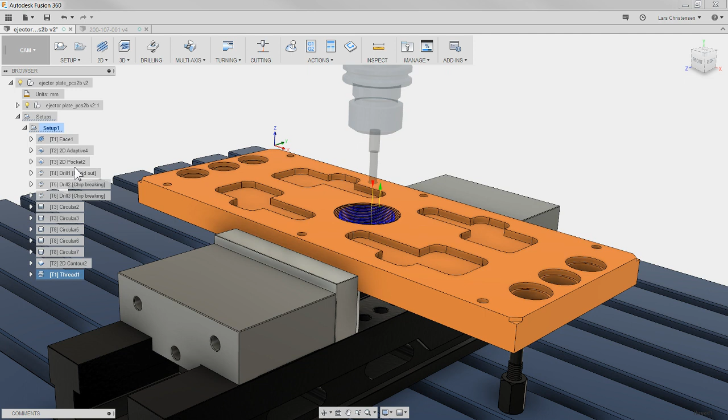So let me switch over here to Fusion 360. This is where we want to be anyways, right? So don't worry too much about what you see on the screen here - you've probably seen me use this one in other kind of environments. But if you look over the feature tree over here, you'll see when I program this part, you apply all these kind of different tool paths to your model. And this is just a fairly simple 2.5 axis, but still, you end up with all different kinds of tool paths in here.

My biggest fear when I was programming CNC machines a few years ago was that you'd forget one of these checkboxes, because a lot of what you're doing is fairly repetitive when setting different things. Like right now I'm in a finishing pocketing operation that by default has stock to leave on, but in this case the adaptive actually did all that work, so this is meant as a finishing operation, so you have to remember to turn that off.

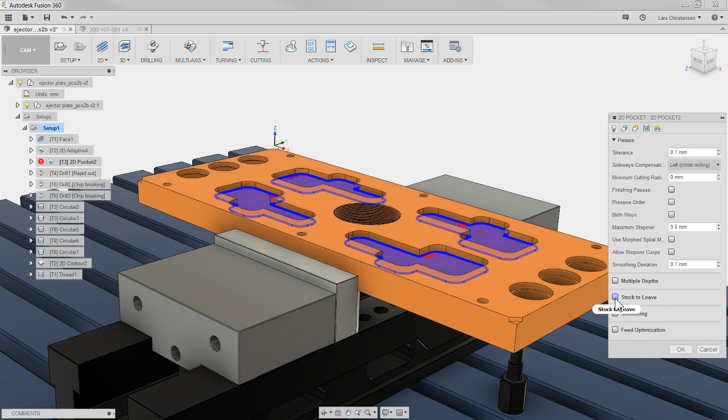You maybe play around with your lead in, lead out. By default it was a helix, but now you want it to be plunge. You're kind of tweaking all these things.

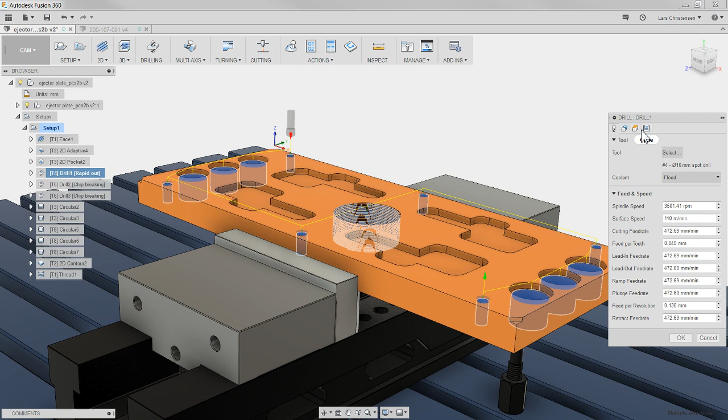This is a spot drilling operation, and normally when I do a spot drilling operation, I always do my bottom height at 1 millimeter from the top. So you're going in and tweaking all these different settings inside your CAM toolpath, and if you're programming on a regular basis, you're doing it over and over again.

My biggest fear when I programmed was always when you make mistakes, it's always like where afterwards you're like, ugh, I knew that.

So what templates will do is let you take something that you programmed where you tweaked everything - feeds and speeds, lead in, lead out, and all these things - and you can save them as a template, and then reuse them again so you don't have to start from scratch all the time.

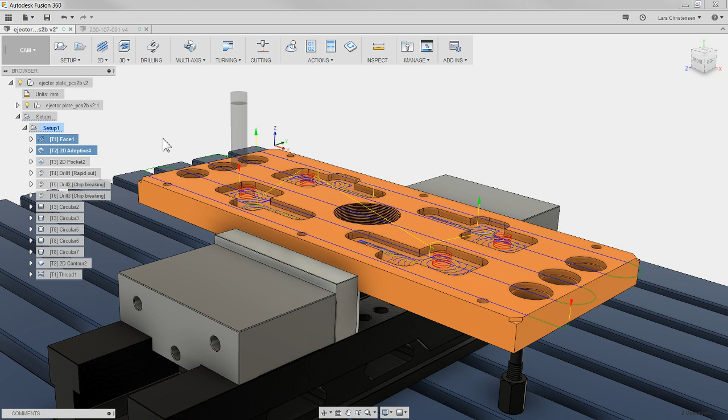So if I go in here, the way you do it is I have this whole setup, and you can either go in and select a few operations, holding down Control or Command if you're on a Mac. You can select a few operations, or what I normally like to do is select all of them - I hold down Shift and select the bottom one. I've selected all these operations that I ran out on the shop floor.

I know that all my feeds and speeds are good for my setup. I know I had the right leads in, leads out, stock to leave, all this stuff. I highlight them all, right click, and go down here and say Store to Templates. When I click on that, it will open up in the location where this is stored.

Now, I'm going to show you in a second - you can actually also do this on the cloud, so I'll come to that in a second. But by default, this is where it will store your templates.

You will see right now I have one called 3 Axis Rough and Finish, and one called Standard Turning. You can name these whatever you want, maybe after a customer. I used to do a lot of hydraulic manifolds, so maybe you program one of those and create a library for that specific customer with those different parts. You can really do whatever fits your situation.

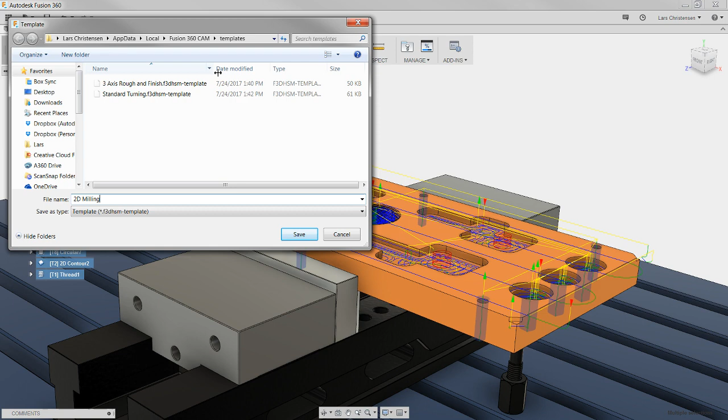So I might just call this 2D milling, and again you'll see where it's saved - by default in your user, your name, app data, local, Fusion 360 CAM, in the template folder. Like I said, I'm going to show you in a second how you can also use the cloud, but I'm going to save this as 2D milling because that's pretty much what it is.

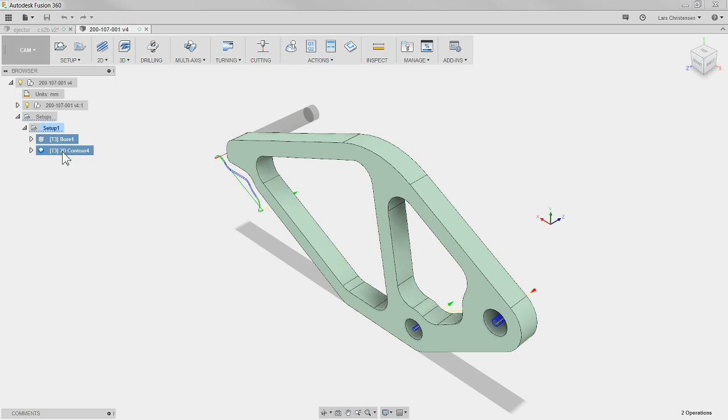So what I've just done is save all these operations in this template with all its feeds and speeds, step overs, and all that stuff. Now tomorrow comes and we've got to go in and program this part. I can see I already have some stuff in here - let's just delete that. Okay, so now you have to program this part, whatever this is.

Maybe not the best examples, but let me take you through this process. So I go into CAM, and you always have to do a setup. I'm going to create a setup, make sure your origin is set correctly, all that stuff you normally do. Nothing new there. When it comes to programming, instead of going up and doing a facing operation, adaptive, finishing and all that stuff...

All I'm going to do is right click on the setup, and right here there's 'create from templates,' and you'll see the different ones I have saved. This is one we just saved, and if you click select template, it takes you back out to where you were. You could actually be clever and create some kind of folder structure out here if you wanted to, maybe specific customers, materials, whatever fits what you think.

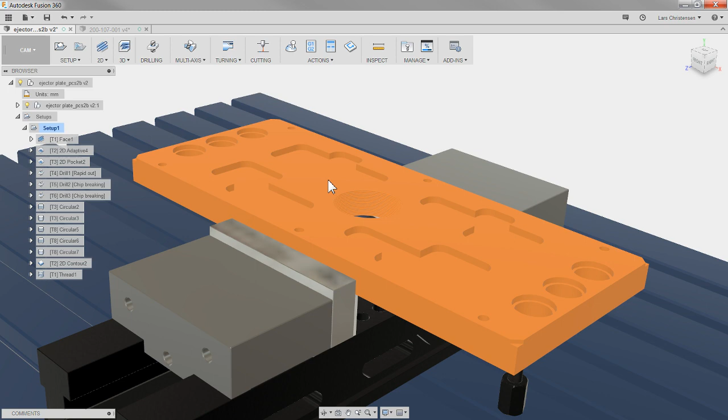But if I select that milling template and hit open, at first you think nothing happened, but you actually get a little arrow here, and here are all those operations from our part over here. Now you say to yourself, well, that's a completely different part from the other one. Well, it is, but a lot of the operations are the same, right?

So what I can do now, you'll see they all have red marks - that's because they need to be generated, just like if you made a design change. The facing operation is pretty simple, so I'm just going to right click and say generate toolpath. That one's obvious because it just finds the outside here. And bam, there's my facing operation with the tool I used in the other one, and I know the step overs, feeds and speeds, everything is okay.

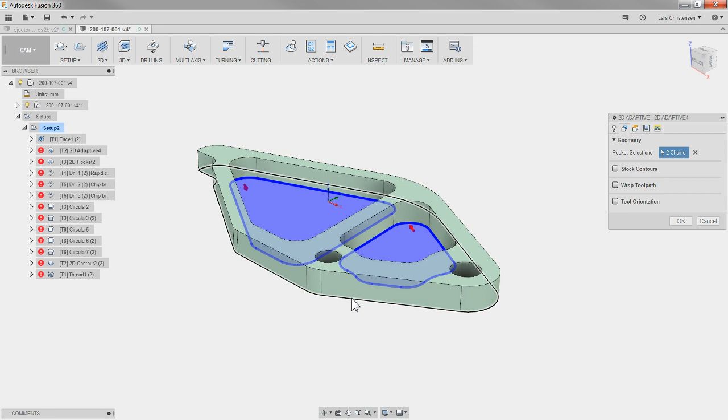When we go down and look at the adaptive, I will have to go in and edit the selection of geometry. So I'm going to right click and hit edit, but I don't have to worry about the tool - that's the same tool with the same feeds and speeds. If I go over to the geometry tab, I'm going to select my geometry. In this case, I might just select the two inner pockets - I want to rough those out - and I'm going to select the outer contour here.

But again, when I go to the heights tab, that's going to be the same as whatever was in the previous operation. My load conditions, my stock to leave, and even my lead ins and lead outs are all going to be from what we had on this file. If we had confirmed that everything worked - oops, I just exited out of it - then you can trust that, A, you're not going to forget anything, and B, that this is already verified.

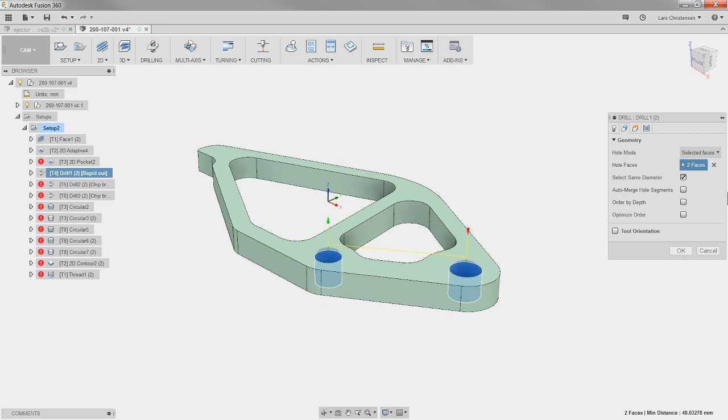Same thing, like I said, I pulled out my spot drill. If I go in here and edit the holes, again my spot drill is selected from that library. I can go in and select the holes here, the two holes, and I now know that my depth is again from whatever I set in that template.

So creating these templates can save you a bunch. Now there's certain things in here that I know I don't need - there was a threading operation on this one over here, but this one doesn't have it. Well, all I have to do is click on it and hit delete on my keyboard, and it's gone. I can delete the operation, right click and hit delete, whatever you want. I can delete the operations out of here that I know I don't need. This is definitely a lot faster than creating all the ones every single time.

Now, one of the questions I got from one of you guys was, how do you delete templates after you have created them?

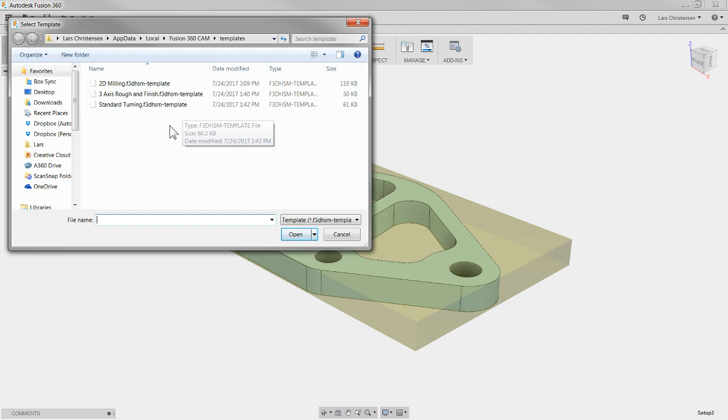Well, all you really have to do is go into one part, right click, and you can go into create template in here. And if I go and hit select templates, I'm brought right back into where they all are. And this is Windows, right? So I can just literally right click here and hit delete, and I can delete that template out of there again. So if you ever got to clean it up or something like that, or you can also just, of course, navigate right to this area.

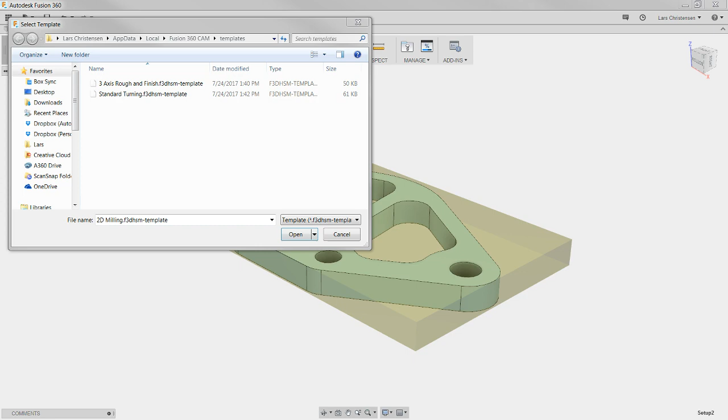If I go in here, if you select up here, you can do a Control C, and then you can just open up your standard Windows browser and paste that selection in, and you're back inside of that area. And you can completely reorganize this in here. If I go in here, maybe I create a folder in here, you can see that it becomes created right in here, and I can now rename this one whatever I want. Materials maybe, customers maybe, really what you find helpful.

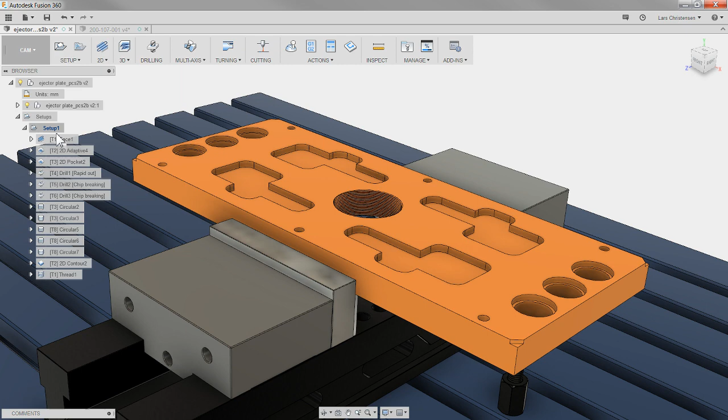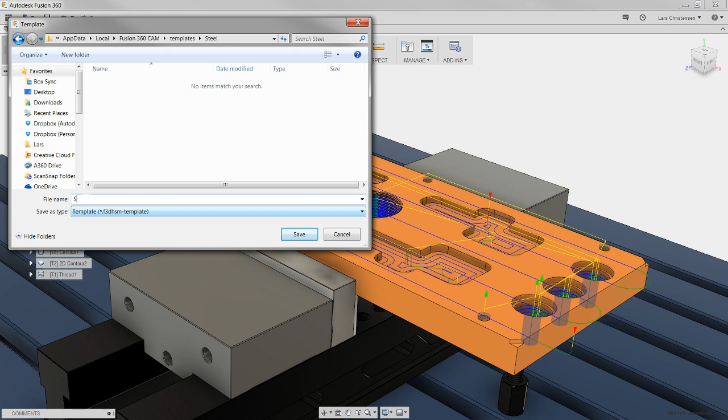So how did I do that again? Let's go back into the first one. I selected the operations, not the setup. I selected the operations, and you can either select just a couple, or you can select them all, whatever you want, and then you just right click, and right down here there is a store as template. You click on that, it'll bring you right to that folder, and you can now type in whatever you want. So if we're going to the steel, we can call that whatever makes sense to you. So that's how you store the templates.

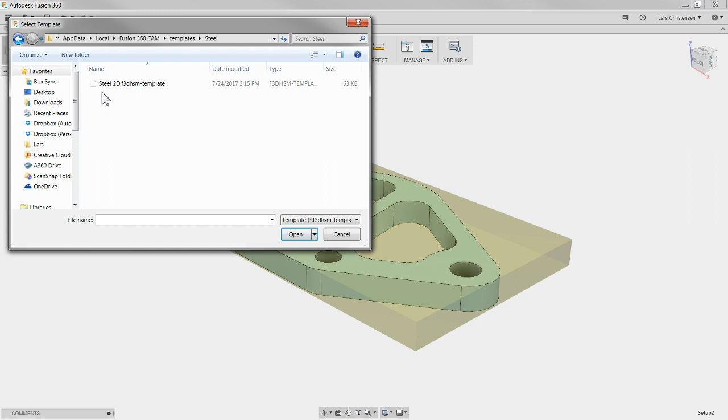And then again, like I said, to reuse these templates, right click on the setup, and then go in and say create from templates. Now you will see right now my 2D steel is missing because this just shows the root directory. But if you go in and select template, you will see that now the steel one shows up, and there is the steel one. Hit open, and now those appear, the ones I selected out of there.

I definitely hope that you find this helpful. It's one of those I almost call hidden gems. If you never played with templates before, it's definitely something you should think about. Especially when you run a part on your CNC machine and everything ran smooth. You got it all dialed in, step overs, feeds and speeds, and all that. Going back in here and saving it as a template can just save you a ton of time.

Now, I said before, cloud libraries, because there are cloud libraries inside of Fusion 360. What I showed you right now is how it works in the default space. So if you just open up Fusion, if you've never enabled clouds, let's talk about clouds.

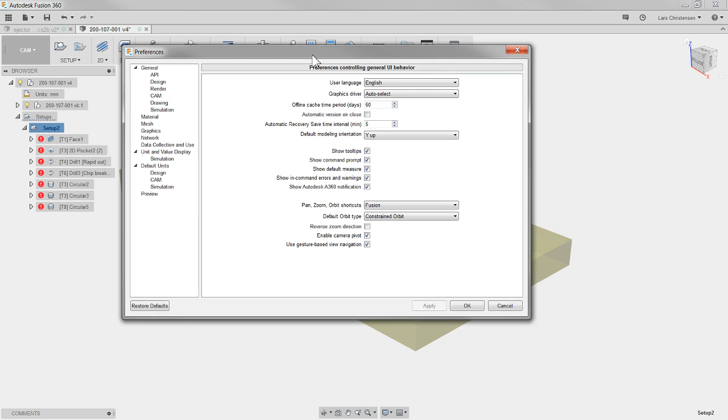So, no, let's not close this down. Let's just go up to your name up here and click Preferences, and that's going to open up in here. And now, I know that figuring out what all the stuff is in these preferences takes time, but I think it's worth spending 15 minutes and just going in and seeing what all the different settings are if you never have. Now, under CAM, you will see that there's something called Enable Cloud Libraries.

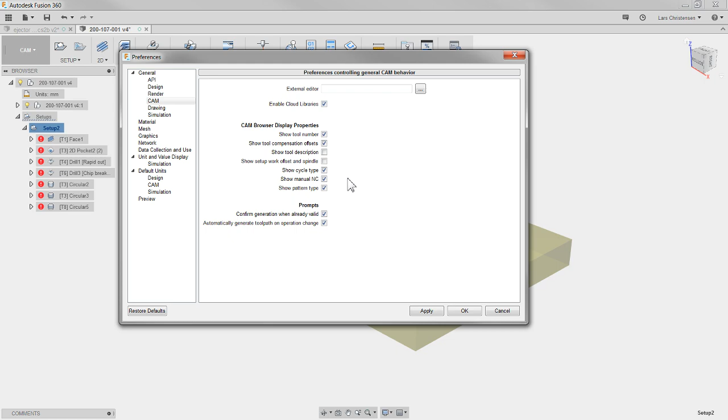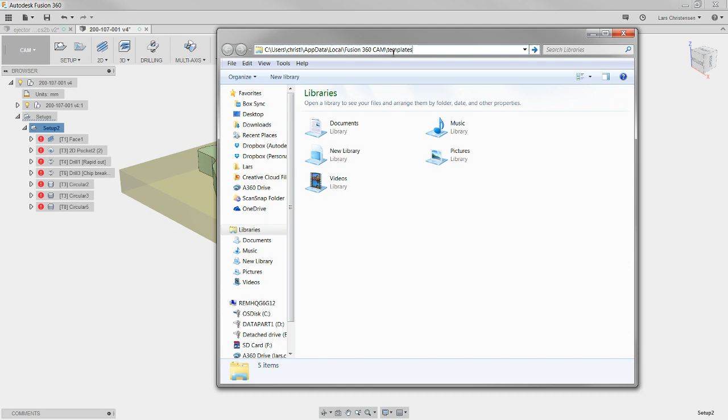Now, if I turn that on and hit Apply and hit OK, that means that now when I go in and right-click up here and say From Templates, you will actually see that I get some different looking templates in here. That's because I'm not pulling from that root directory, users, username, app data. I'm not pulling from it locally on your machine anymore. I am pulling from the cloud.

And that can be extremely helpful if you, for example, are working on a laptop out on the shop floor, but you're using a PC at home and you program a little bit at night. That means when using the cloud library you can log into any machine that has Fusion with your credentials, and that library, those operations, will be available for you.

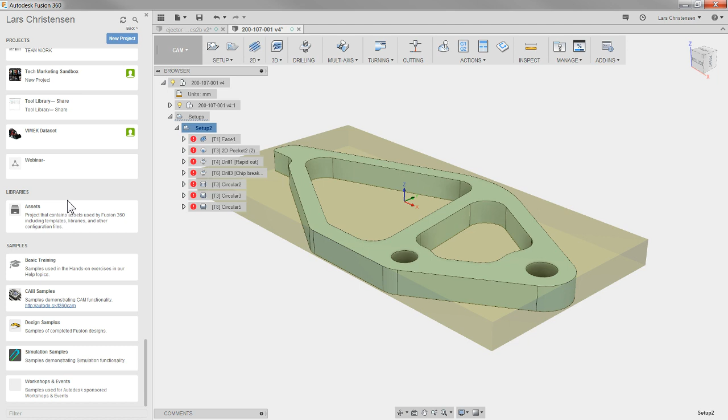Where they are located in Fusion for the cloud: if you go out to the data panel and go all the way out to the root, if you scroll down near the bottom, there's something called assets. If you open that up, you will see that there is CAM templates, CAM tools, and CAM posts. Last time when I talked about tool libraries, that's where they are stored. Well, here is where the templates are stored.

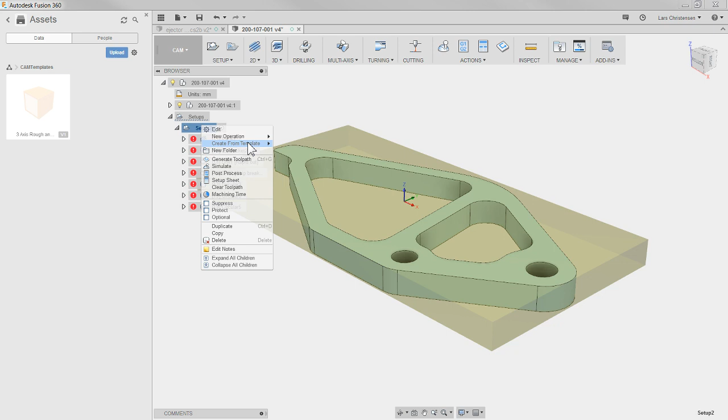And you will actually see I'm part of another group. That was why you saw those other templates in there when I right-clicked and did from templates before. Now you'll see it shows up with these different templates. I think I probably have to shut down Fusion and restart it for it to kick in. But this is where templates from now on will be created.

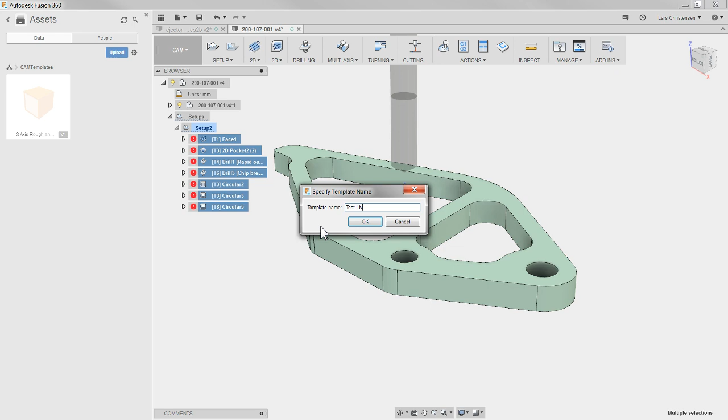So, let's see, maybe I don't want to restart Fusion if I don't have to. If I go in on this operation here, right-click and say store these as templates. Now I get a template name. Let's call it test live stream. I didn't test this out, folks. Let's just see here. Like I said, I might have to restart, but there they go. So now you will see that it gets stored in here.

Which is pretty cool. So they're not stored locally. Now they're stored in this CAM template folder that was under your main directory down in assets, and you can now bring these in.

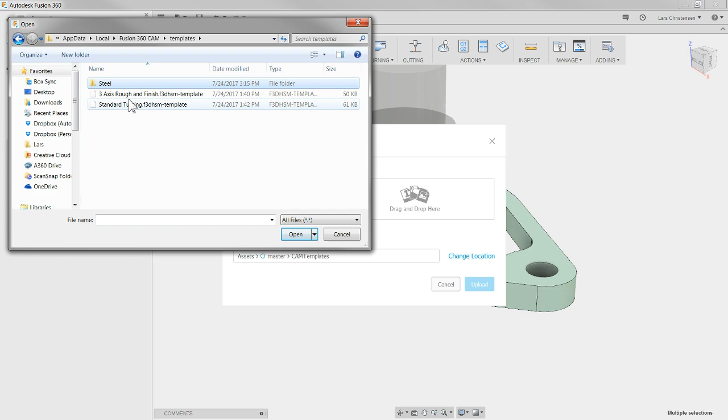Now, I also wanted to show this because some of you are going to say, well, this is awesome, I want to use the cloud because the cloud is awesome. But what about the libraries that I have already stored locally? How do I get them in here? You just use the upload button, just like if it was a file. So I go in here to upload and select files. I can paste in that directory wherever they are located, select them from right there, and bring them up in here, just like you would do with a file. So that's how you can bring things from local up here if you want to.

But if you've never played with CAM templates before, unless you have some reason not to, I would go into the preferences, turn on cloud libraries, and just store them in the cloud. There's not really any reason to have them locally, unless, of course, you want to do a kind of dual thing, and then you can do that too.

If you go back into this area here, you can always go out to the web access for these, right? So I can click right here, and it opens up another screen. Click right here, and the folder will open up. And now I have my libraries, and you can bring them local if you want to. You can share them with other people if you feel like it.

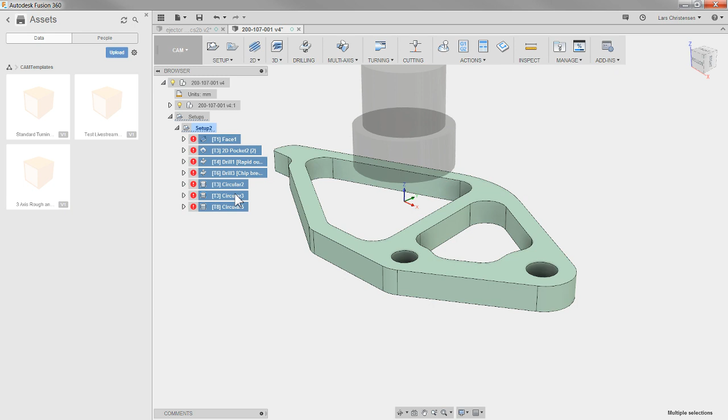So just to reiterate, for the few people who didn't hit it right at 3 p.m. Eastern, these templates are extremely helpful. You program the part on your mill or your lathe or whatever, and you've got all the settings set in here. Your feeds and speeds, your stepovers. You ran it on the machine. It was awesome. You got a great part, and you're thinking, man, if every day could just be like this.

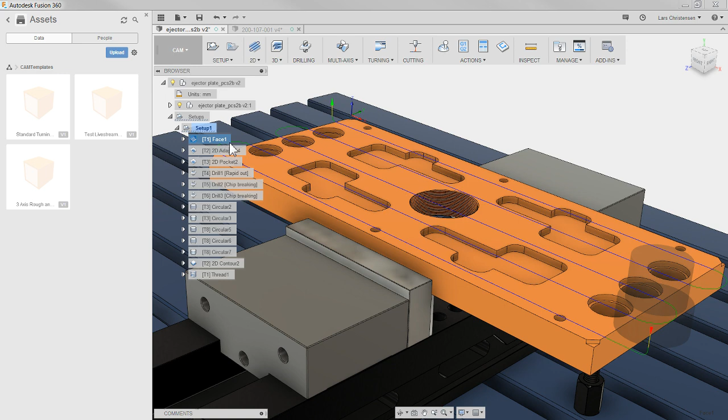Well, if you go in here, like I said before, you can save them as a template. So right-click, you can store them as a template. You get to give them some kind of a name here. Let's just call these 2D live stream. And again, I'm doing this right now on the cloud. If you want to do it locally, this video will be up on YouTube in 20 minutes or so, and you can see how you can do it locally.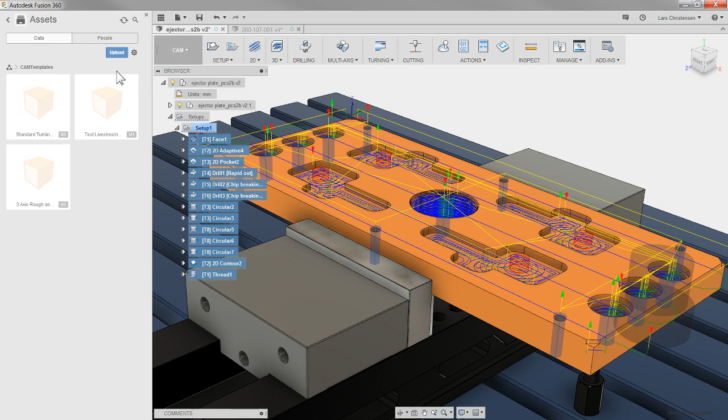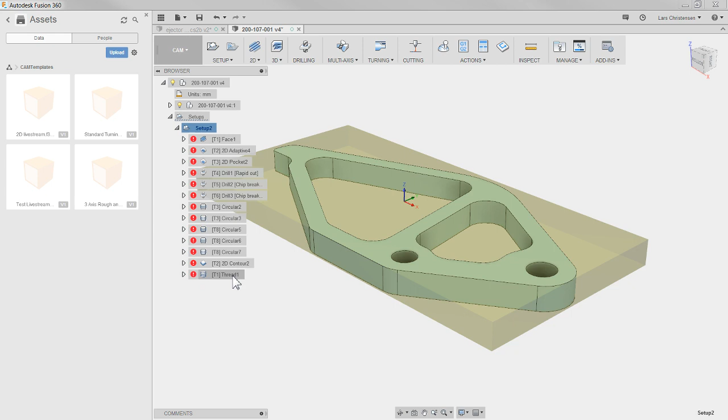So now that I've been brought up here, if I go back into this part, that is a new part we got from a customer. We will create a standard setup, and you will just right click on that and say create from template, and there will that library be. You select it, and all those operations that you had from the previous jobs where everything was happy, the customer loved the parts, they paid you top premium, and all you now have to do is to go in the operations that you maybe don't need from that part.

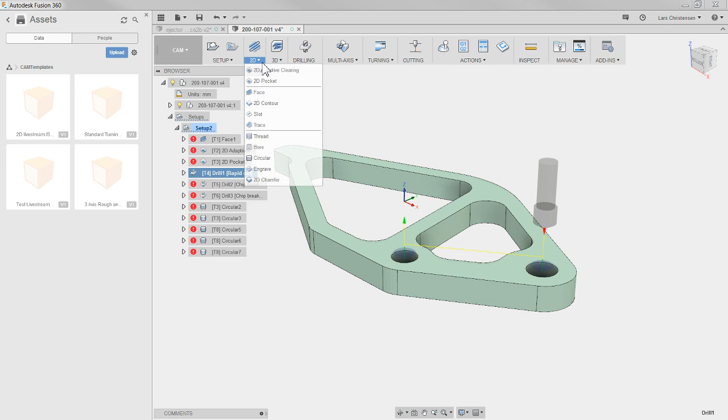You can delete those. You can go in and you can edit each operation, but all the feeds and speeds and everything are the same. You just have to go in and maybe select the geometry that needs to be selected in here. You can, of course, add more geometry in here. So maybe I go in and say I want to do a 2D chamfer, and that will now be added in here. And then maybe you add that to another template, however that kind of works.

All right, guys, I hope this was useful. Like I said, today was just all CAM. So I hope that you guys found that useful.